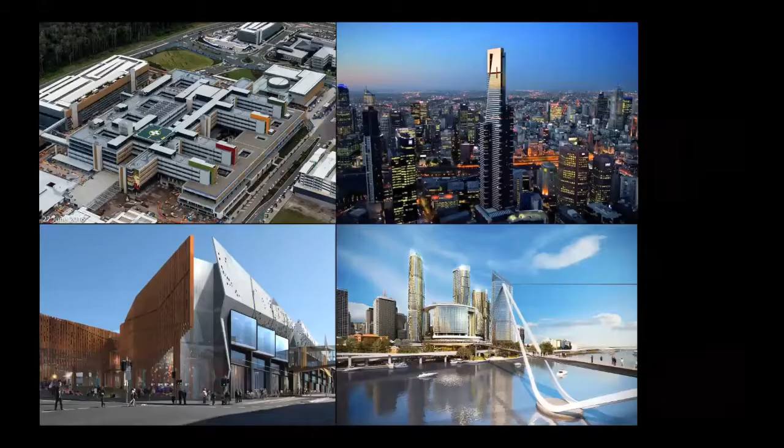So this is just an example of some of the larger projects that have been delivered in Australia, either totally using ArchiCAD or mostly using ArchiCAD. A lot of people would probably recognise Eureka Tower up in the right-hand corner in Melbourne. It's about an 88-storey building in the centre of Melbourne. Top left-hand corner is Sunshine Coast Hospital, which was a $2 billion P3 project, which was a 70% ArchiCAD, 30% Revit documentation project.

Bottom left is a retail project in Wollongong. It's about a $200 million retail project, but it has some extraordinary design features around it. It's a West Keira project in Wollongong. And the one in the bottom right-hand corner is a project that I've been involved in most recently, functioning as a BIM consultant for the project architects. This is a project which I'll just show you some information on from their website. Up in Brisbane, it's called the Queen's Wharf Brisbane project. It's a casino, leisure, hotel, residential project.

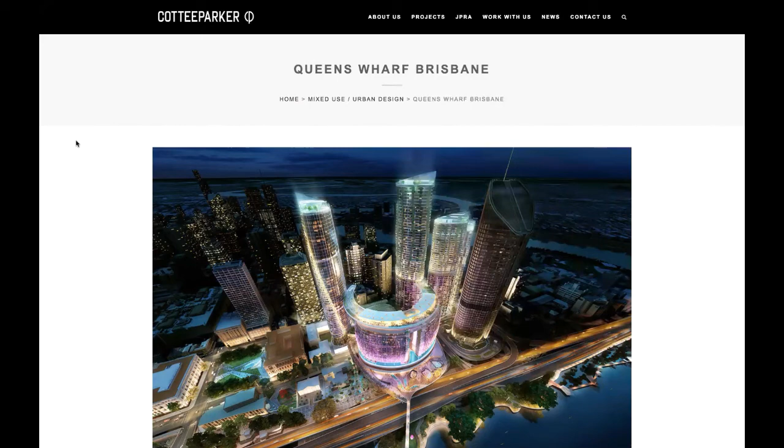So this is the website for the architects of this project. They're a firm called Cottee Parker, who have been using ArchiCAD for well over 20 years, up in Brisbane, which is where I'm from, and they've actually been going through quite a lot of expansion in the last year or two across a number of cities in Australia, and this would be their largest project by far in Brisbane, which is the Queen's Wharf Brisbane project. As I said, it's an integrated leisure resort. It's got casino, hotels, residential on it. It's about a $3 billion Australian dollar construction cost for this project.

And I'll just jump you over to the website for the actual project itself for the DBC, which is the Destination Brisbane Consortium, which you can just Google and go and have a look for yourself. But just to show you, that's a good diagram there that shows the breakup of, you've got a hotel tower, you've got these two sort of semi-circular towers that sit underneath the sky deck, which is about the 24th floor. There's another tower over here, which is hotel, and then 2 residential towers.

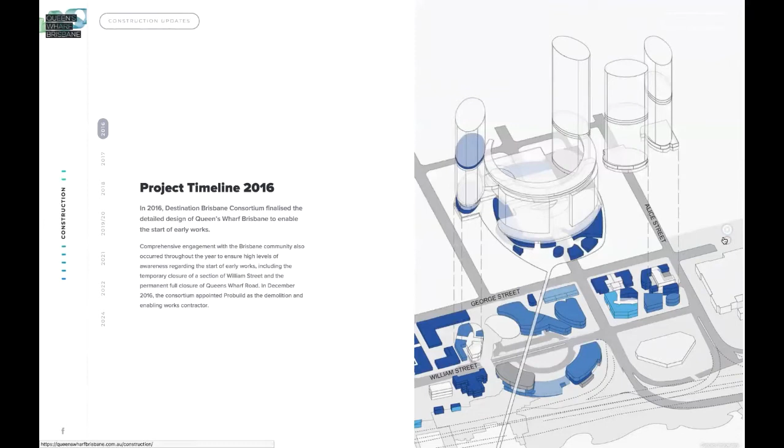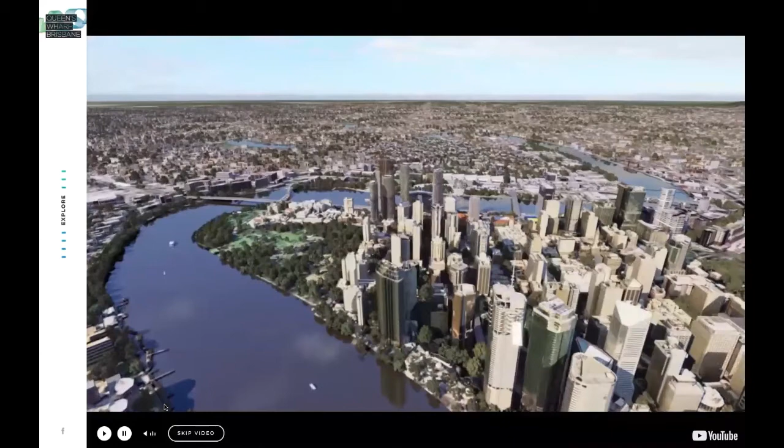And that all obviously sits on a ground floor plane and has quite a large sort of basement underneath it, and integrates with a lot of heritage buildings there. It's right in the middle of a parliamentary precinct. It's got lots of old sandstone buildings in it and the like. So to give you an idea of the size of the project, its context and the like, I'm just going to take you to this page with the video. So you can see where this sits in a very prominent position in Brisbane, right on the river. As I said, it's along what's called George Street, which is a parliamentary precinct.

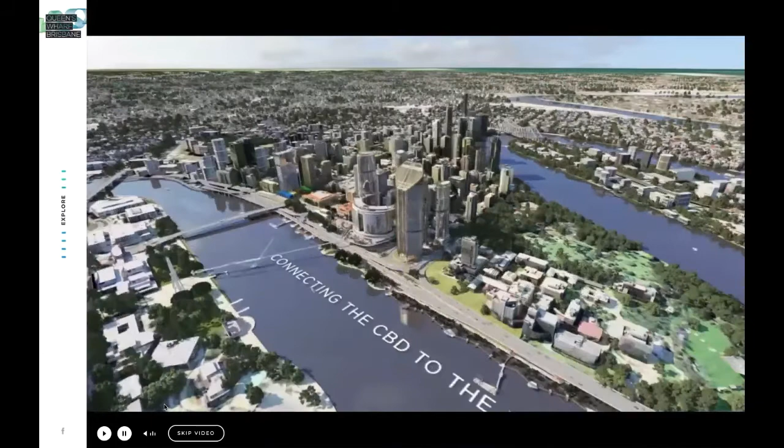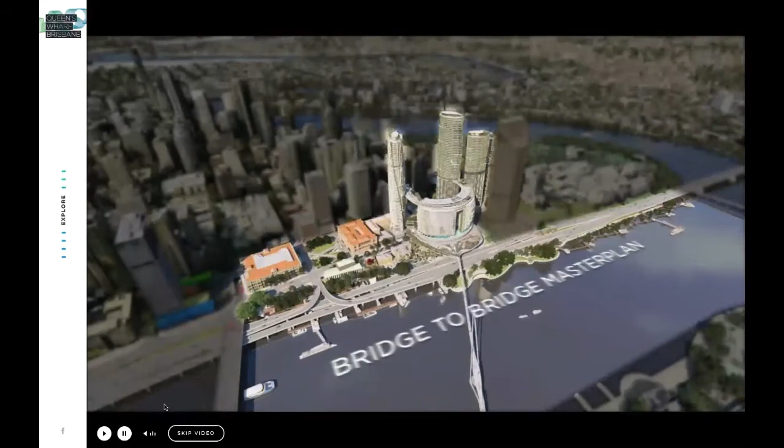It's got a university at one end, and it's right on the corner of the CBD. So it's quite a large project. As I said, Cottee Parker are the architect for this project, and they're doing all of the base building works, back of house fit out, etc., which is all being done within ArchiCAD.

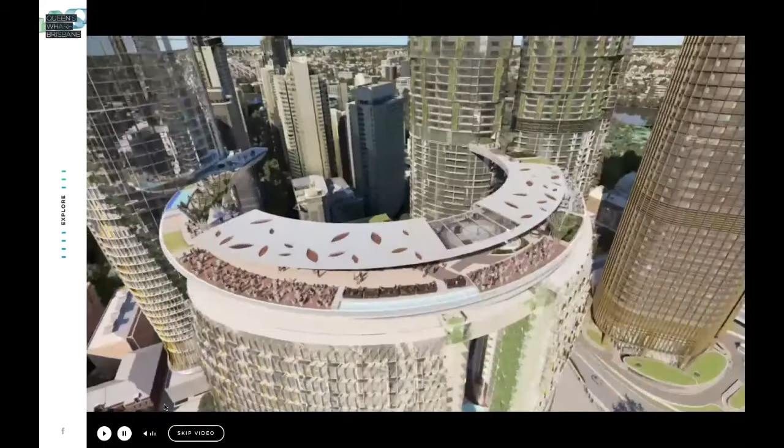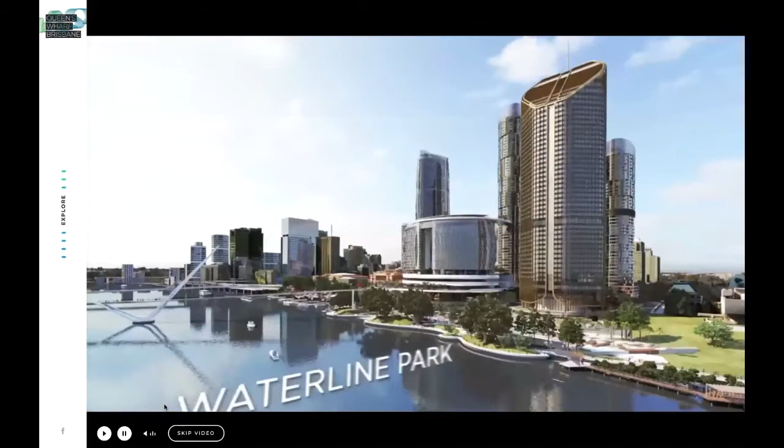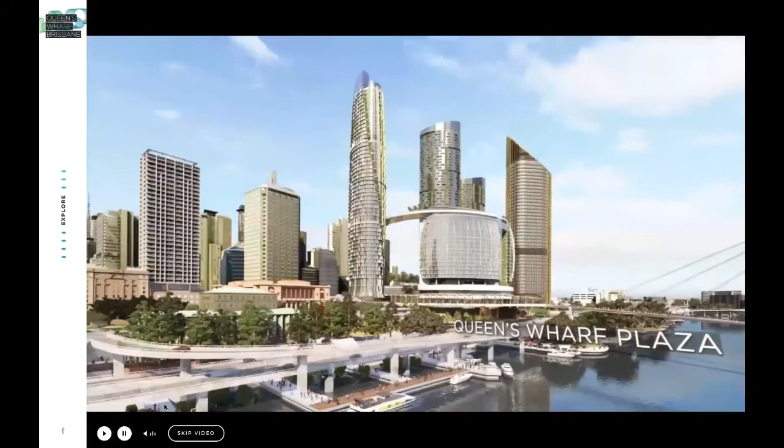And then integrating with, I think there's about 20 consultants, design consultants on this project at the moment. Quite a number of those guys are using Revit. So there's a lot of toing and froing with using IFC. And there's a lot of requirements from the client in terms of information and data that they want in the IFC file, and in particular place in the IFC file.

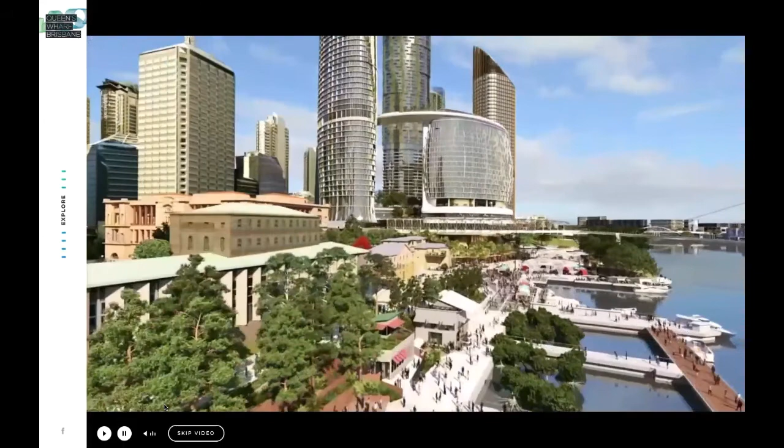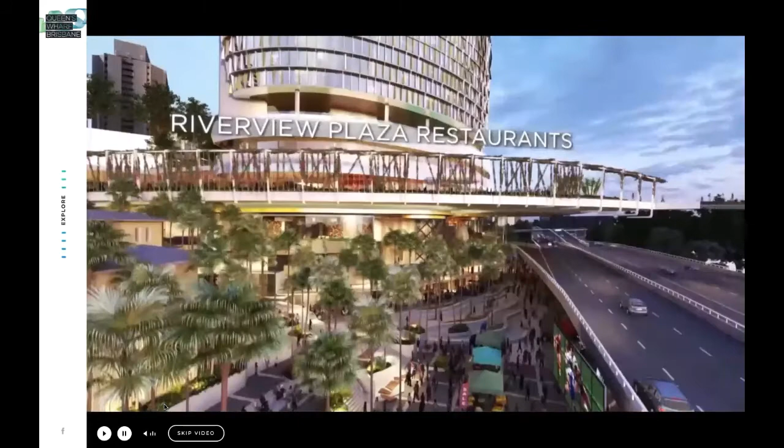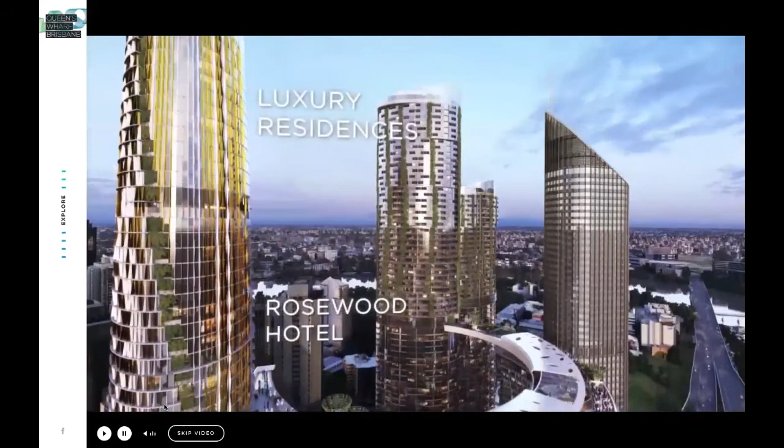So my role in this project has been to assist the architects, particularly with looking at the type of information that needs to be in the file, where it needs to be, and looking at the processes by which they do that. So as I said, it's quite a large project. But as I said to Cottee Parker Architects right at the front, guys, we're on the right platform. We all know we're on the right platform. No one's thinking about changing to something else. And they agreed. And so we've proceeded from there.

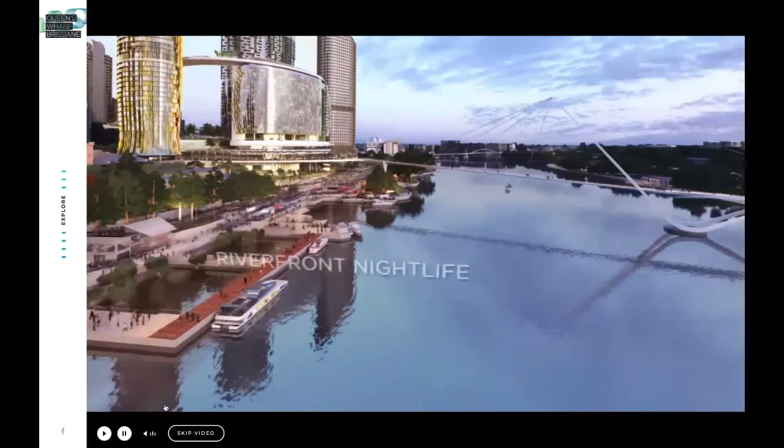So the project goes to tender in the next couple of weeks. That's the phase we're at. So I'm going to take you back into the presentation. What I'm going to take you through now is some techniques for how you deal with projects of size within ArchiCAD. And I guess they're things that I've developed over the years through experience. They've largely held true from project to project. I guess the only thing that's probably changed is ArchiCAD's ability to take larger and larger file sizes and the like.

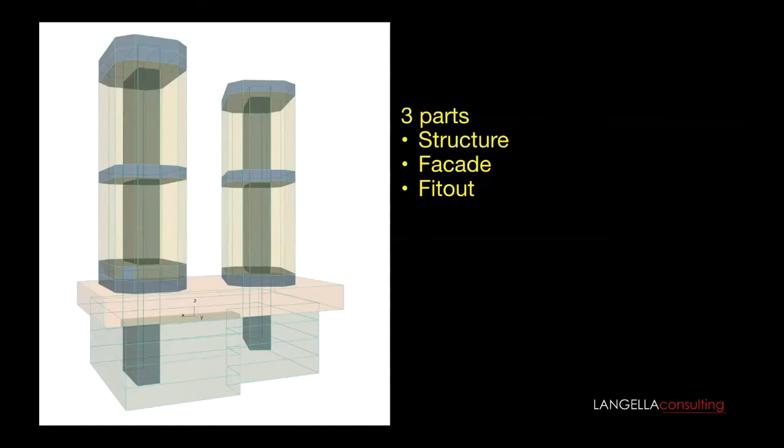So the first thing I like to do with any type of project that I'm working on is to break that building down into 3 parts: structure, facade, and fit out. And in terms of levels of accuracy, I always have structure as being 100% accurate. If you end up pouring $15,000 worth of concrete in the wrong place, you're going to have to pay for it and jackhammer it out. Whereas if you make mistakes with fit out, it may not necessarily be as costly, although that's different in healthcare, as some people probably already know.

So the other thing I like to do, once we've broken that down into those 3 main areas, is then identify the repeatable elements on the project, looking at the core or cores where fire stairs and vertical circulation are happening, looking for typical floors. You may have wet areas that are typical from floor to floor, or a standard rooms process, which you have in health. And typically I say to people to keep the entire project within a single file, and just keep going until you feel that the file is unmanageable, and then have a strategy to split.

Looking at the diagram on the left, the only reason I might split a project of that size, let's say 2 towers with a podium and a basement, is that you might have different floor-to-floor heights. One tower might be commercial and the other one's residential. If that's the case, I would definitely split those, because you end up having this problem managing different floor-to-floor heights between them. So it's easier to split one tower out and leave the second tower with the basement works in there, and then join them together in the layout book.

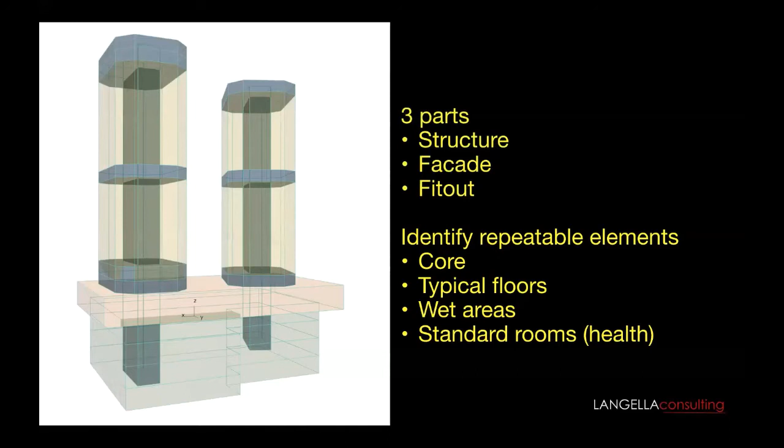So what I'm going to look at is one of the processes I'm quite familiar with, which is creating room layouts. I think some of you refer to these more as enlarged plans, your 1 to 50 type of plans for room types, and then how you integrate that across the model and back into your general arrangement. I'm going to use health as an example, but you could use the same technique for a unit type if you were doing residential or hotels, or the core, typical floors, etc. But in this case, we're looking to take a room that might be repeated a number of times within a hospital.

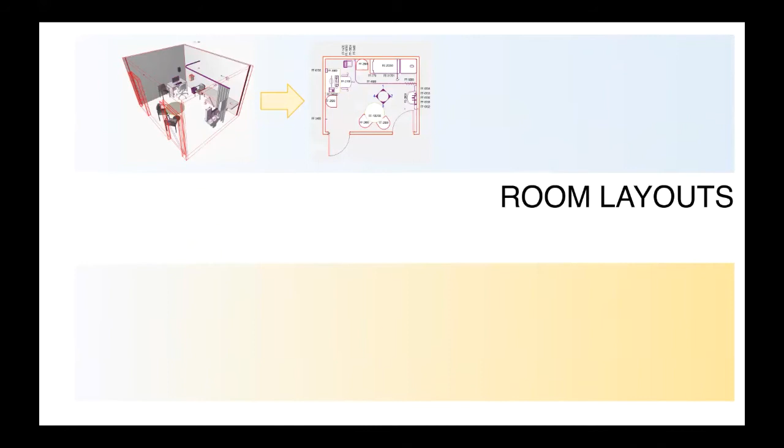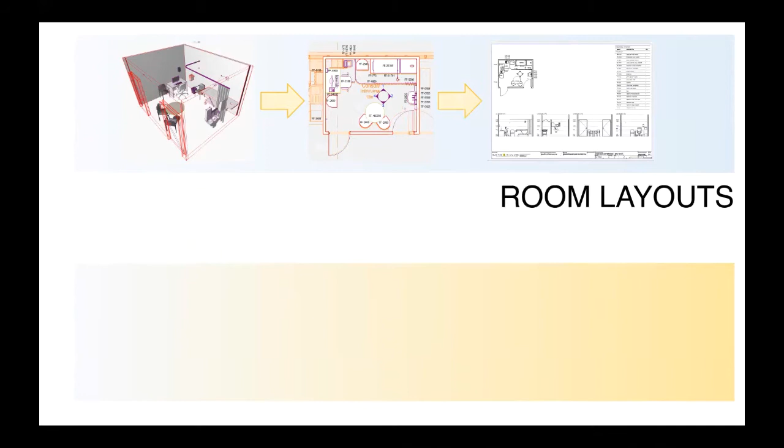The first thing you want to do is be able to document that room. So what I would do is model that room and add the annotation, add the walls that you require, and then you can document it from there with your elevations, etc. But then from that model, for general arrangement coordination, I'd also want to publish a mod file out from there.

What I'd be looking at doing is setting up the file with a room per story. It's a much easier way to do it. Once upon a time I might have had a separate file with these rooms in it and a separate file with the master building. These days I tend to set up a whole bunch of stories underneath zero - in Australia we'd call it the Australian Height Datum, I'm not sure what we call it in the US - and put a single room or unit on each story.

One of the projects I've got at the moment, I think I've got about 180 stories underneath a hospital. I don't think there's necessarily any limit we're going to hit there anytime soon.

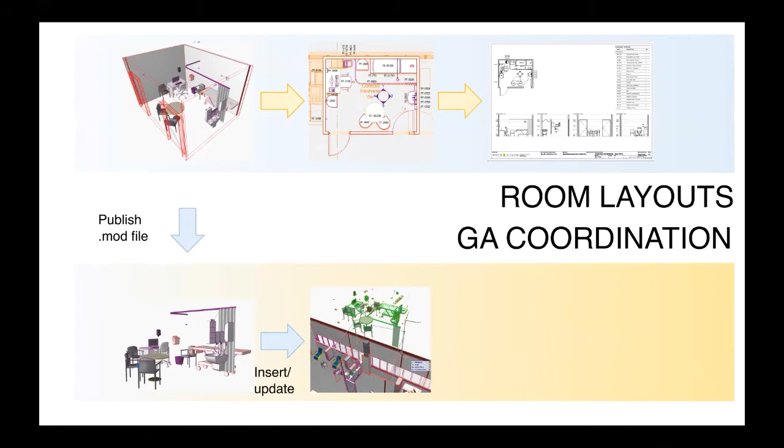So from that story I'd publish out a mod file, then insert it in the model, and you can update that over time. The reason I'd publish that mod file is it only takes out the elements I need. So the walls and annotation I needed for 1:50 documentation, I may not necessarily want, because I want the unique walls that are in the master building. So I only publish out what I want. The mod file is tiny, and it really acts as a filter, only bringing what I want into the main file.

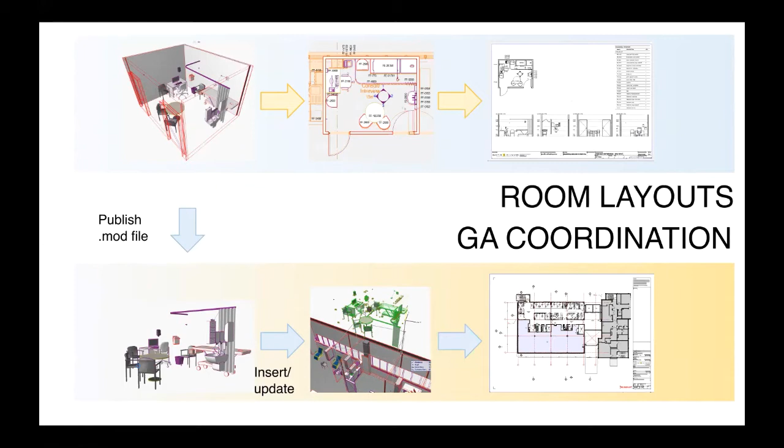And from there, of course, I create my 1:100, 1:200 documentation. I've used this process on a $2 billion hospital - we had about 6,500 to 7,000 rooms across there, and a number of them were repeatable, and it worked great for a project of that scale. We had a rule on that project: if there's more than one, you apply this process. Because what you're always looking for in any software you're trying to apply to your business is a single action that gives multiple consequences. We're a service-based industry, and we're always looking to multiply our effort within any given time.

So I'm going to talk about IFC and Open BIM. I've had a fair amount of experience around this over the years with multiple projects and doing coordination, etc.

I don't want to get too technical with IFC, but I want to make it clear: IFC is a container. It's an open file format specification to describe building and construction industry data. That's what it is, and if it isn't in that description, then it doesn't do that. There's nothing in there that says anything about containing layout information or annotation for drawings, etc. So it's great for 3D geometry and data - contains all those things quite robustly - but it's not good for 2D.

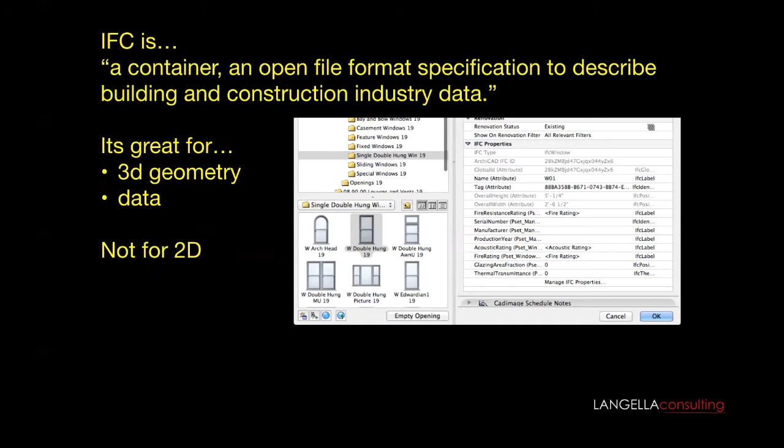There have been improvements made over the years, both on the Revit platform and on ArchiCAD, etc., but generally the file description - that's not its job, to take across 2D data.

I'll give you an example. This was from a project I was actually working on a couple of weeks ago. We kept going up to story 2, and it took about 30 seconds for the screen to regenerate in ArchiCAD, and we were trying to figure out what's going on.

And suddenly I realised that each symbol had about 4,000 lines. So each louver bank, you can do the math. Suddenly I realised it was trying to regenerate hundreds of thousands of lines every time we went to that story. So it was a fairly simple process to change that. But that was another example of where stuff was coming through from IFC that wasn't, in terms of the 2D, really fit for purpose, and we had to do some work on that.

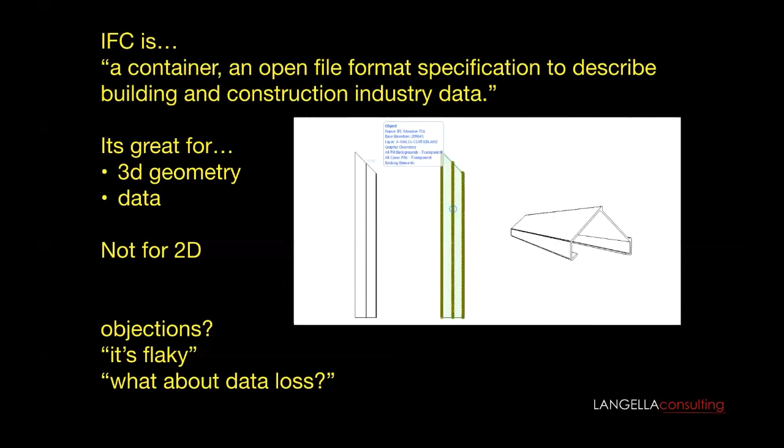So I think an important thing to remember with IFC: blaming IFC for just about any issue is like walking into your child's bedroom and blaming the wardrobe for the clothes being on the floor or in the wrong place. IFC is a container. We build models in ArchiCAD and they get translated into IFC in the best way they can, and then they get opened in another platform like Revit and get translated into Revit elements in the best way they can. In some cases, certain things will translate in certain ways because the software can either deal with it or can't. So there are certain things that might be a beam element within Revit, but when they come into ArchiCAD, because the beam tool doesn't deal with that kind of geometry, it turns into an object.

But as I said, I've been using IFC for file transfer for many, many years. Been using it for coordination on small, medium, large projects. Typically, nothing's ever going to happen if you just sit in your office and someone rings you up and says there's a problem, and if you don't actually leave your office and go have a look at what their problem is, it's never going to get solved.

So, consultant coordination, as I was talking about before, I've used IFC quite a lot for that. And we use a product here in Australia, which I know doesn't get used a lot over there, called Solibri.

One of the things I particularly like about it is just the way that you can actually overview problems within your model and overview issues.

I think one of the things that a lot of people who have used Navisworks become very aware of: Navis will pick up every single clash and report every single clash, but there's quite an effort if you want to group those clashes into an issue, then it's not necessarily that easy.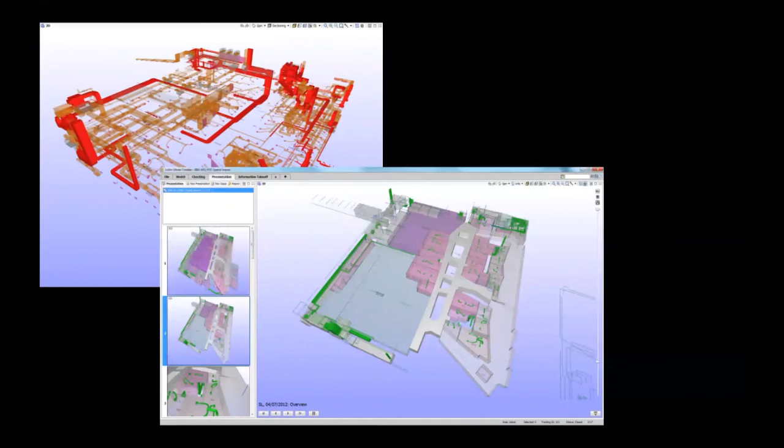Solibri has been very good at it, and this is an example here of the spaces in a retail project, and any of the services that are falling into those spaces, they shouldn't really be there, show up visually. It's really easy in a meeting just to walk around that building and take shots, create a presentation and a report within Solibri showing where those things are.

So it's really good at being able to overview problems, so you can have them as a discussion point and then create issues from them.

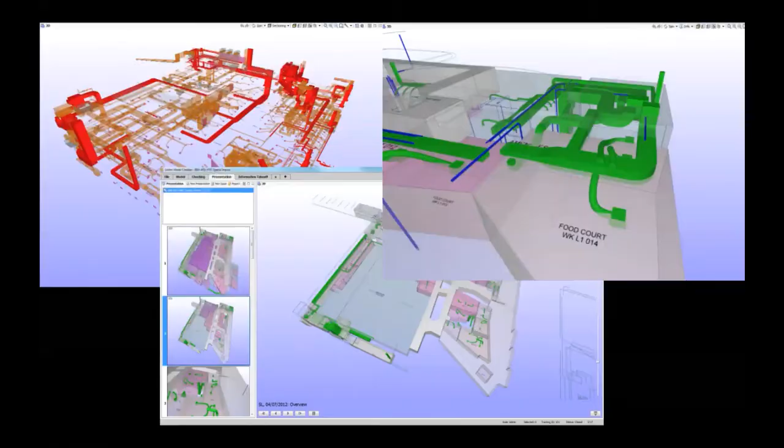I do love these people, services engineers quite often - you say, are you guys actually working in 3D? Yeah, we're working in 3D. I said, well, your model doesn't show it. And they're like, no, we're working in 3D. Well, here's a couple of examples.

The one on the right, I was saying to them, why, when I've got a raked ceiling in this space, have you given me a design for a flat ceiling? It's one of the things people have been using ArchiCAD for - people on Revit can't just throw a marquee down around an area and go to the 3D window and walk around it in 3D and in perspective and look at it. That's not how Revit works.

What I find is a lot of engineers are typically still working in plan, and not all of them check it in 3D, but occasionally you do, and so you get these sort of examples of things that happen here.

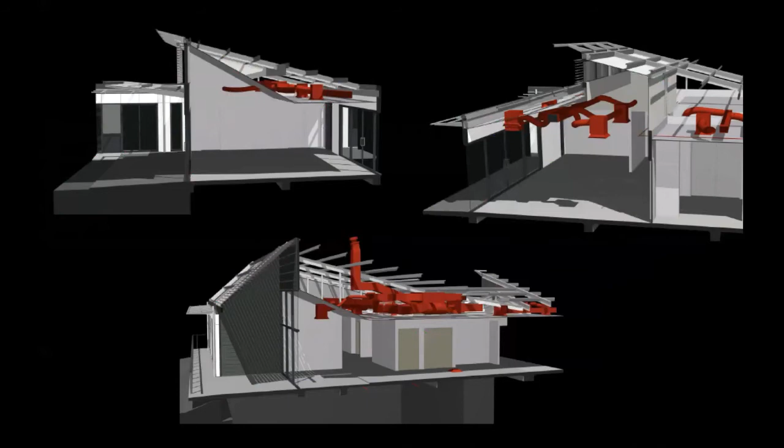So again, sometimes I think it's really worthwhile getting alongside your engineers and seeing exactly how they work. I think this is one of the key questions you need to ask yourself when you're creating documentation, when you're coordinating with your consultants and the like.

I hear people say, 'Oh, I just want to have a single model where everybody's working together, and why can't everybody work together?' And I'm like, what are you actually trying to achieve by that? What are you actually trying to get to? And is that realistic in the contractual framework? So I challenge people, I guess, in terms of what we're doing with documentation.

We have a 3D model, and quite often all we do is create traditional documentation from it. Here's a good example of a section through what is actually quite a complex building, but it's a flat section. It does the job, it shows the set out, etc, but it doesn't really convey necessarily what the relationships are between elements.

So it's quite easy within a program like ArchiCAD just to add a series of perspectives with this. Now, I remember someone looking at this and going, why would you do that? The builder doesn't pay for those perspectives. Why are you putting these on the drawing?

The answer is, well, if you're working within any sort of BIM platform, the 3D information is already there. To put those on the drawing really is hardly any extra effort. But what it does is it shows the builder far more information, and it goes a long way to reducing risk on site.

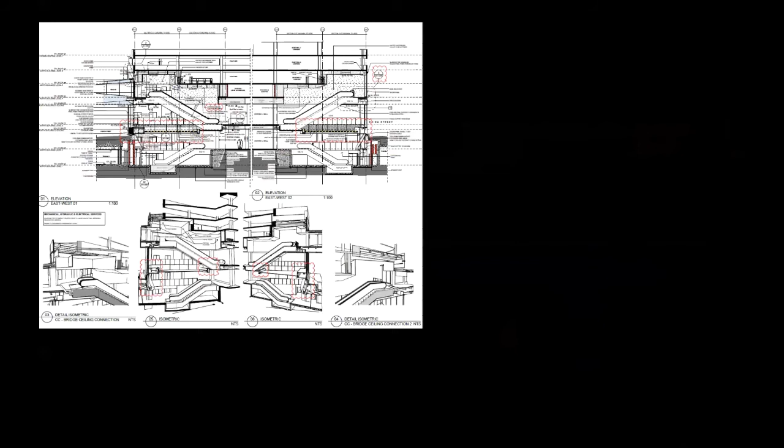The other thing to look at using in ArchiCAD as well in this area is to use schedules and to use the graphic schedules. You can't do this very easily in Revit, if at all. You can do kind of a facsimile of this, but to do door schedules or equipment schedules and to use the graphics with those is quite easy to do within ArchiCAD. And it's quite a time-saving kind of thing if you can make that work for you.

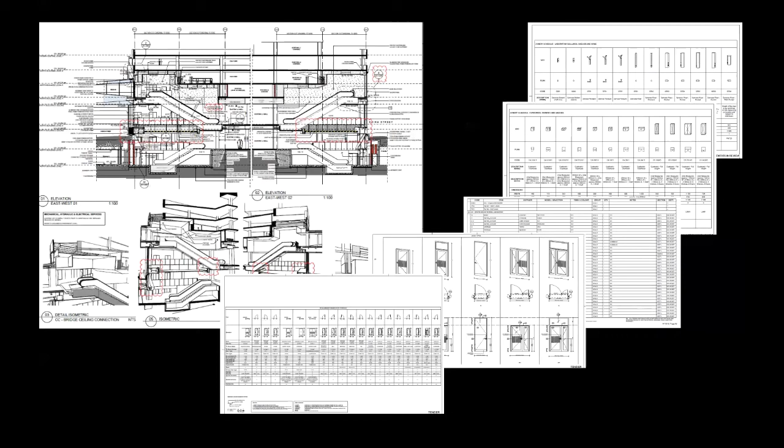One of the things I've looked at doing over the years: door schedules and window schedules are the fairly obvious ones that everybody wants to do. Everybody does theirs differently, but that's fine. But one of the things I've looked at, particularly on large hospitals, is looking at joinery and the way that you would document joinery. So I kind of figured if you placed all your joinery within the model, why would I have to do anything else except try and extract information at different scales?

So typically we would do two other types of drawings for a joinery package. We would do this 1 to 50 drawing that showed typically what the size and the arrangement of the various joinery units would be, and we would also do 1 to 10 or 1 to 20 strategy drawings. Well, I kind of figured if I could, maybe I could use GDL to do both and the like.

So what we did on a lot of the hospital projects I've worked on, and I'm working with a small firm at the moment to help them achieve winning larger work, is to do exactly this in the area of joinery. All the 1 to 50 drawings now are a graphic schedule that just come directly from the model. So for that project, there's only 4 hours probably spent per drawing just working out title blocks, whereas the rest of the content is automatically generated.

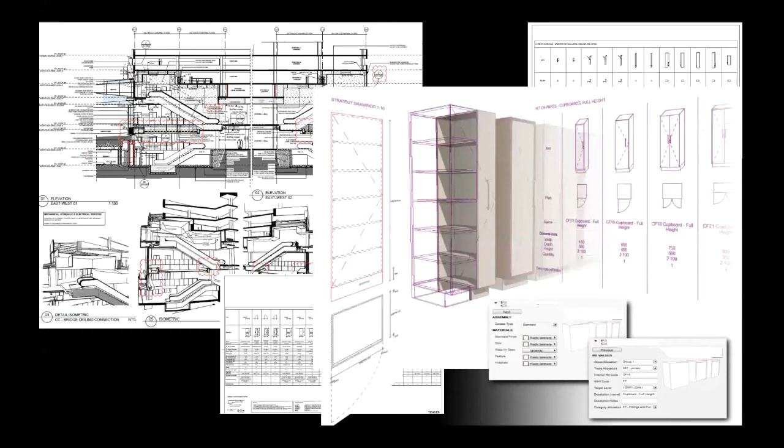And strategy drawings are created by just taking one of those objects and dropping it in a worksheet at 1 to 10. You've scripted it in the background with GDL, but it in fact will document itself and give you a drawing similar to what's shown there. So what I would encourage you to do, in whatever your practice is and whatever sectors you're working in, is to think big.

As I said, I've been working on ArchiCAD for a number of years. I think my first big hospital project I started working on in ArchiCAD was in about 1998. And one of the things I've found over the years as we've pushed the software and challenged the software is that quite often there's been some programmer somewhere in Europe, probably in Hungary, that's actually thought about what I'm going to do before I've actually done it. And we have been quite often surprised and delighted at what we've been able to achieve with ArchiCAD on a whole range of projects.

But I hope this has given you some inspiration and some ideas just based on some of the things that we've been doing down here in Australia for a number of years.